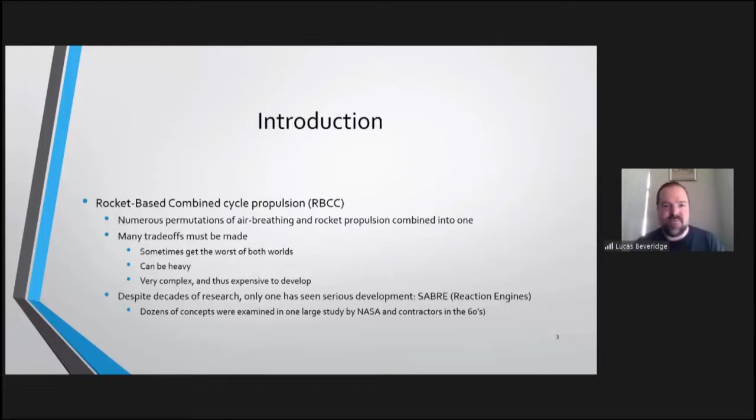They usually end up being extremely complex. It's one of those things, sort of like aerospike engines. It sounds really great in theory, but when you start looking into it in more detail, it's not so great. They usually end up being really heavy. You try to get the best of both worlds, but a lot of times you get the worst. And so they haven't gotten very far. I think Reaction Engines has probably gotten further along in development than anything else, as far as I know.

I know this is a fairly technical audience, so this is probably really basic here, but for those that aren't aware, the performance of any propulsion system, rocket or jet, is usually talked about in terms of specific impulse, which is the amount of thrust you get per unit mass of propellant going out the tailpipe. So of course a jet engine would have a much higher specific impulse than a rocket because so much of the reaction mass is just air. You get it for free, you don't carry it along with you. And so you can get more delta V in theory. I suppose I never calculated the delta V of a 747.

It would probably be extremely high because the specific impulse for a big turbofan is tens of thousands of seconds. So the delta V for a 747 would be enormous going around the world, but you have atmospheric drag in the way, which complicates things, so it doesn't actually keep accelerating, of course.

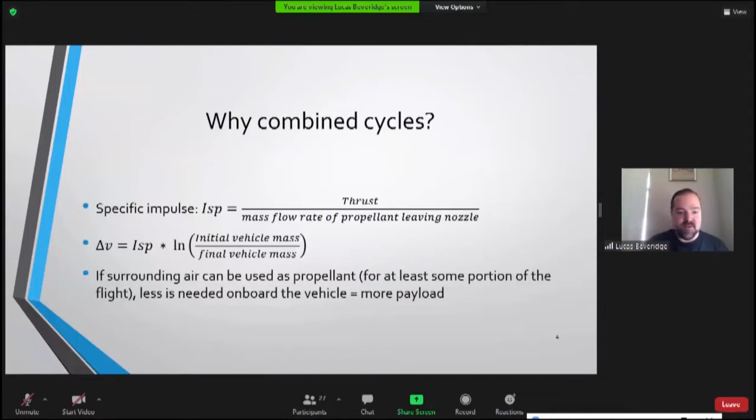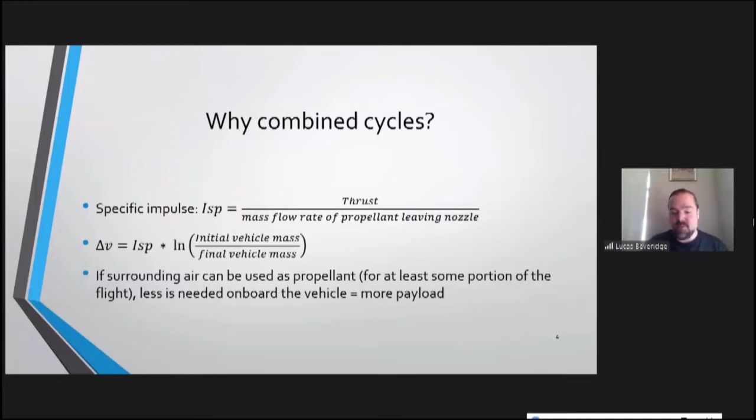But anyway, the whole point is that using the air as reaction mass can get you a lot more payload. So if you can accelerate through the air and get as much impulse out of it as you can, you don't need as much rocket fuel, and you can increase your payload to orbit and maybe even get away with a single stage vehicle.

So this is what I was thinking about. In a previous job, I used to be a design engineer for Honda, and it was not a strenuous job. I spent a lot of time daydreaming at work, and this is the kind of thing I daydreamed about.

So I was imagining, I had experience with hybrid rocket motors, and was wondering if maybe there was some way you could build a really simple combined cycle engine that didn't have all the complication of liquid hydrogen pumps and propellant, all this complicated stuff that would make it difficult.

And so what I came up with conceptually was a hybrid rocket combined with a solid fuel ramjet, which at the time I didn't even know was already pretty well developed. Apparently they've been studied for cruise missiles and things like that, and some had flown.

I started looking at that for a long time, a little bit in the background, as a side project, like I said.

So the concept really is you need to get up to high speed initially. So it would probably have to start as a rocket, or it needs a supersonic carrier vehicle to get the ramjet, or maybe even a scramjet, going.

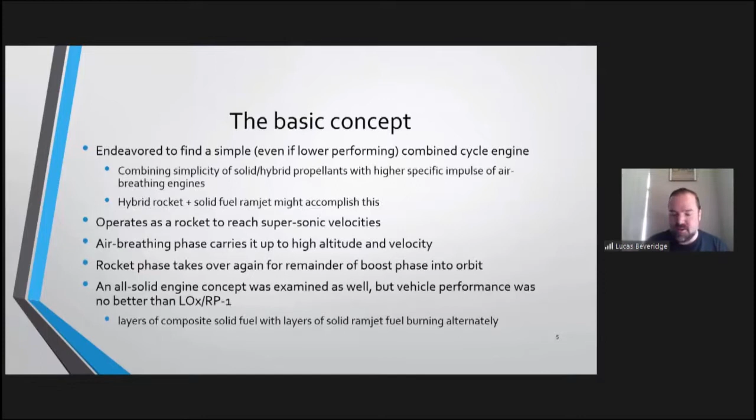But after quite a bit of modeling, I discovered that the overall performance was no better than ordinary liquid oxygen and RP1 kerosene, so I didn't include that in the final paper. I did in an earlier draft, but I found a few errors in my initial models, so it turns out the performance really wasn't that good. But I thought I would mention it because it's still really interesting that you could build something like that.

It's just a candlestick that switches back and forth between rocket and air breathing.

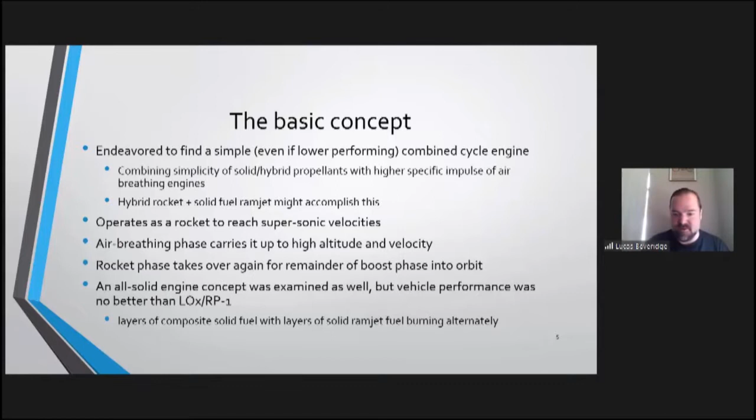So here's an illustration of what I eventually came up with. I settled on paraffin as a fuel because it has a high regression rate.

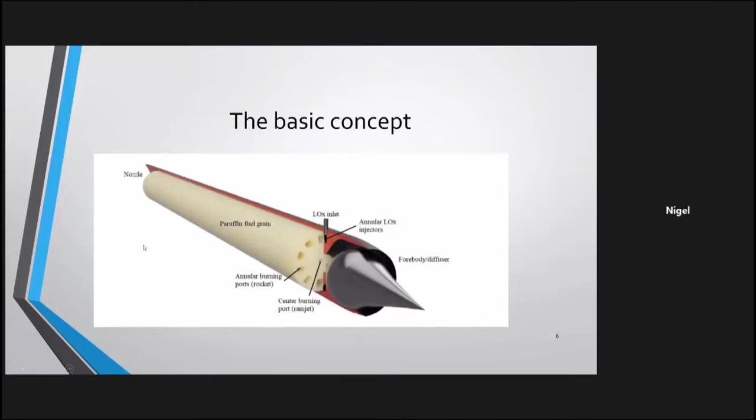It works very well in a hybrid rocket because it has a low melting point. It vaporizes very quickly, and so one of the issues with hybrid rockets is typically low regression rate.

A common fuel is something like HTPB, synthetic rubber, which has a high specific impulse, but it burns very slowly, or it regresses very slowly as it burns. Paraffin burns much more rapidly, so it produces higher thrust, but still has good ISP.

So in this illustration, you can probably see fairly well here, there's a center burning port where the incoming air is burned. So you have really two separate regions inside the one fuel grain: one where you inject liquid oxygen, and the other where the air is fed in from the inlet.

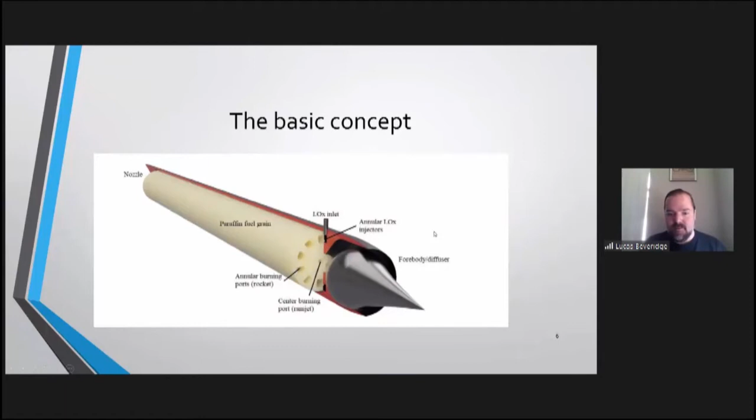So that's the basic concept. The implementation, or estimating the engine performance, gets extremely complicated. However, once I started getting into it more, I wanted to simply model the engine by itself, but that's not really possible.

You need to have a lifting vehicle. Something I discovered early is that you need a lifting vehicle, and you have to have a space plane to some extent. Even if you don't plan on landing on a runway, you have to climb gradually out of the atmosphere to get the most out of the air breathing phase. It can't be a pure ballistic vehicle like a normal rocket. Well, I mean, I could, but it would be kind of pointless. You're not going to get as much out of the air breathing portion of the flight.

So you have to know the specific impulse at any moment during the flight. But that, of course, depends on the vehicle velocity, the air density, the temperature, and how much fuel has burned away. The thrust and regression rate is a function of the oxidizer mass flux. I'll get into that later. But it ends up getting very, very complicated.

So just to show, to give a flavor of that, down here you have the effective specific impulse and equivalent effective specific impulse. Effective specific impulse is just the ISP at any given moment. T is thrust, D is drag, W is weight, and theta is the pitch angle of the trajectory. So the trajectory matters, the drag, the thrust, all of this has to be accounted for.

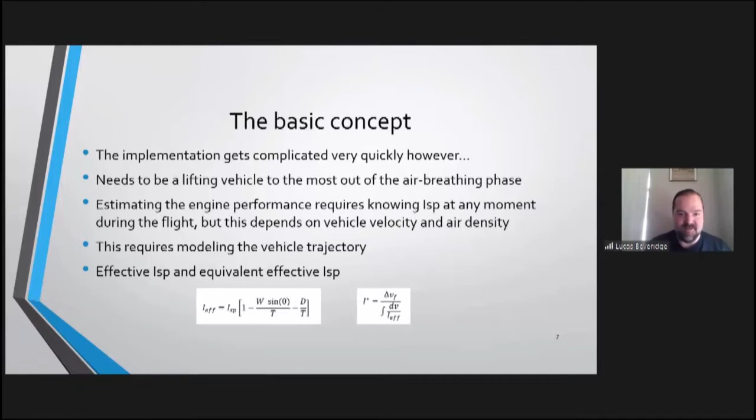So there were a few complex mechanical considerations I really wish I could have explored further, but I had to sort of hand wave some of these things. I knew they were solvable problems, like the variable inlet geometry for the inlet.

That of course has to be necessary because you're accelerating through such a wide range of Mach numbers, like the SR-71. It's not simply a cruise missile that's launched with a rocket and cruises at one specific Mach number.

The nozzle and the combustion chamber and all these things have to operate under two very different operating modes—two different chamber pressures, mass flow rates, temperatures—all of which put a lot of constraints on the design. This is some of the trade-offs I was talking about. Sometimes combining two different things, you may not end up with the best of both worlds.

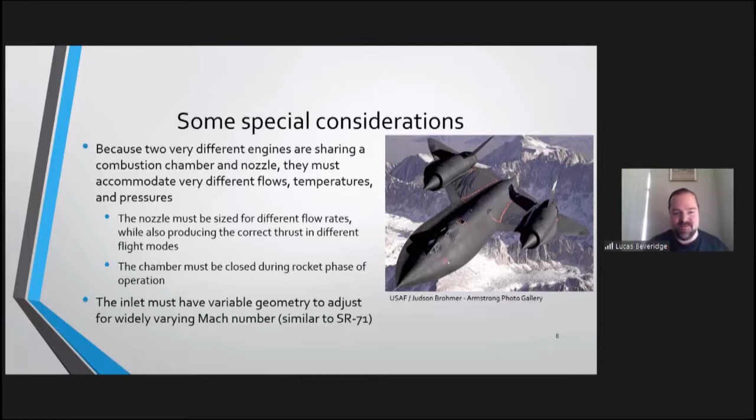So I'm going to step through more or less how I built my simulation code, my 2D trajectory code.

Because of the dependence on the flight path, you have to solve the equations of motion, but also solve for exhaust velocity and mass flow rate. Drag coefficient is a function of Mach number. Atmospheric density is a function of altitude, temperature, pressure, so I had to have an atmospheric model. Theta is a function of time as it goes.

So I had to build an entire engine simulation code that models the regression rate of the fuel, the oxidizer-to-fuel ratio, the ISP, chamber pressure and temperature, gamma, all the fluid properties as it's burning, to calculate the exhaust velocity and mass flow rate. But then mass flow rate is also a function of airspeed, and so on.

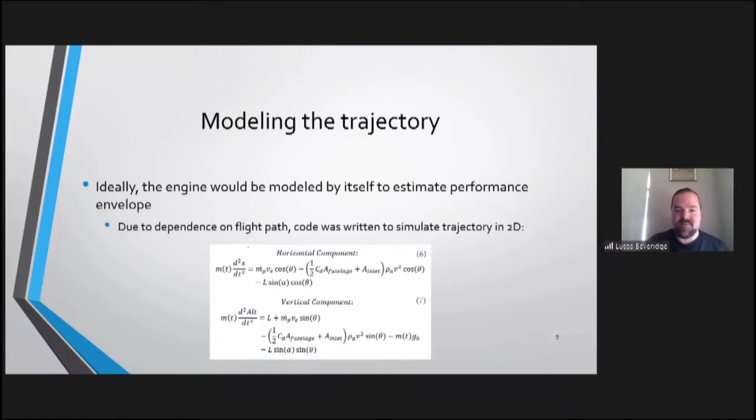So it gets—this took me a long time as a side project. I was teaching myself a lot as I went along. I should mention, I started working on this project in 2013, I think, and worked on it on and off, but I didn't actually get the final paper written until a couple of years ago. Then I finally submitted it and went through revisions. But yeah, it was educational.

So anyway, the other parameters you have to worry about—the chamber pressure is going to determine a lot of things.

But the chamber pressure, at least in the air breathing phase, is proportional to the stagnation pressure. But it's not equal to the stagnation pressure. It doesn't drop when you're at Mach 1 or below. You can assume it's pretty close to the same, but as the Mach number increases, the pressure recovery drops, of course.

That's why ramjets don't work very well above Mach 5 or 6 or so. At that point, there's just not enough air getting into the inlet. So that's another thing that had to be incorporated into the engine burning model.

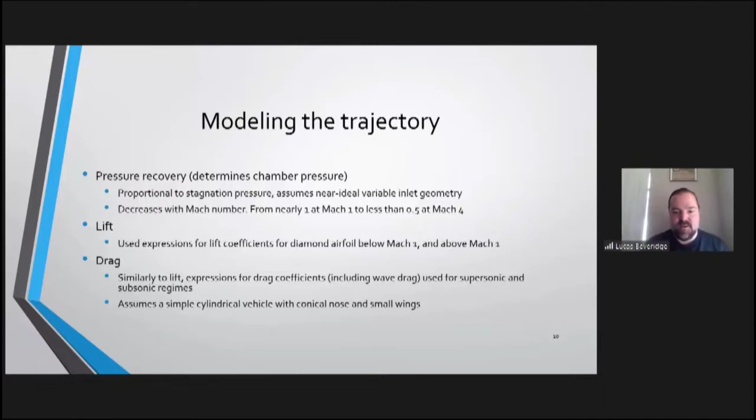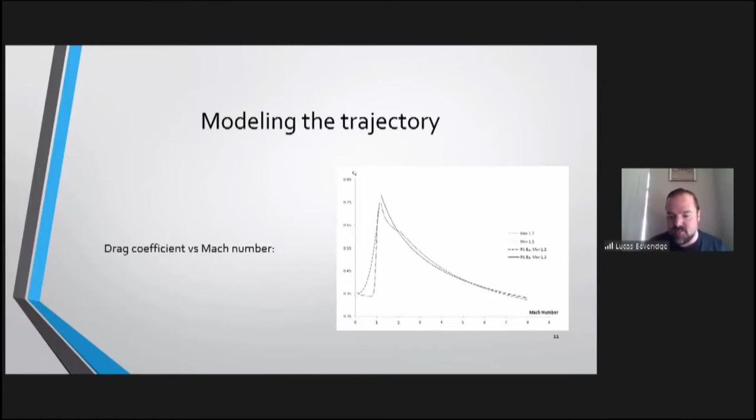Drag, similar. I actually had a CFD code that I was able to use to model wave drag coefficient. It was somewhat limited. I could only model it as a cylinder with a conical nose or an ogive nose, and short stubby wings. But I was able to model the diamond airfoil wings, fins. And this is just the drag coefficients that I got. So the small dotted line was the simulation, and the large dotted line and solid line are my best fit expressions that I used in the model.

And then there's the atmospheric model, which determines the temperature, pressure, and density of the air at any given moment as the vehicle is moving through it. They used the 1976 standard atmosphere. Pretty straightforward standard thing.

The engine itself, though, was more complicated, and I had written another code previously for simulating a performance code for modeling hybrid rocket engines, and I knew how to do that. I knew that worked very well. I was able to fit experimental data that I gathered from engine tests. So I was able to incorporate that and modify it to determine the mass flow rate and the fluid properties performance of the engine at any given moment.

But that also gets very complicated because it's also a function of oxidizer mass flux. So the rate that the fuel is burning away is a function of the pressure recovery and the airspeed, and it gets very complicated and ends up behaving in very non-trivial ways.

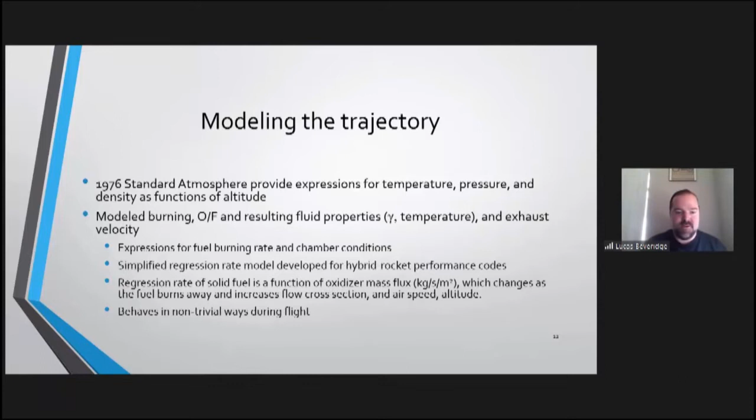Just getting these models to work correctly and making sure I didn't overlook something - and I very often overlooked a lot of things. So I did eventually get it all put together, but doing this as a side project while I was in grad school, working on other things, was interesting.

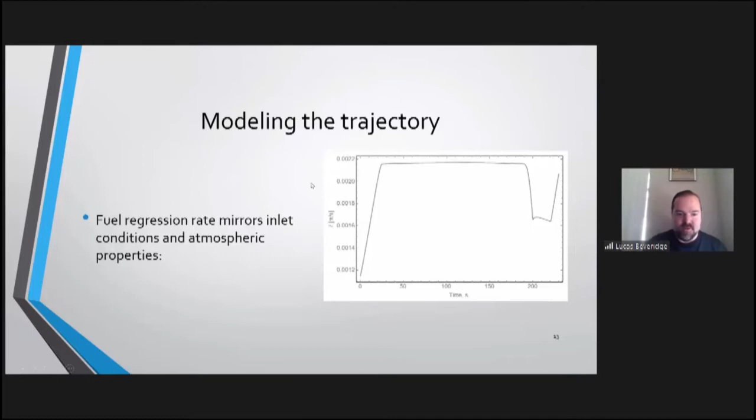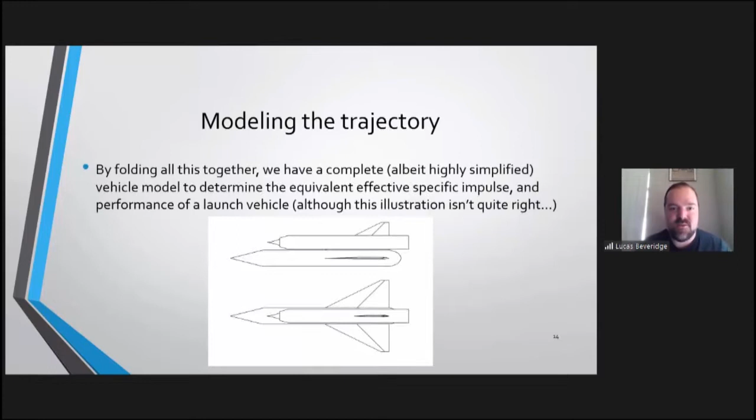The wing loading would have to be really high. Like I say, I'm not an expert in aircraft design either, so I calculated the stress in the wings to make sure they wouldn't break off because the wing loading is extremely high. But I found you could do it with composites. It is possible, but it's certainly not an ideal design. Better designers could do a better job than me. I just wanted to show that the vehicle could work and what the potential performance is.

So I did, as best I could, mass component breakdowns of the vehicles. I did look at an SSTO and a two-stage option. The single-stage vehicle, well, I'll get to that, but it performs okay. But there's a lot of other masses. My referee pointed out to me - his quote was, 'The devil's in the details.'

In my first draft, I didn't incorporate all of the component masses and vehicle mass. He pointed out that with these sorts of vehicles you have all these other structures, wings, landing gear, thermal protection, it adds up. So I did incorporate all of that, and at the end I have mass breakdowns for all the different vehicles, if anyone's interested.

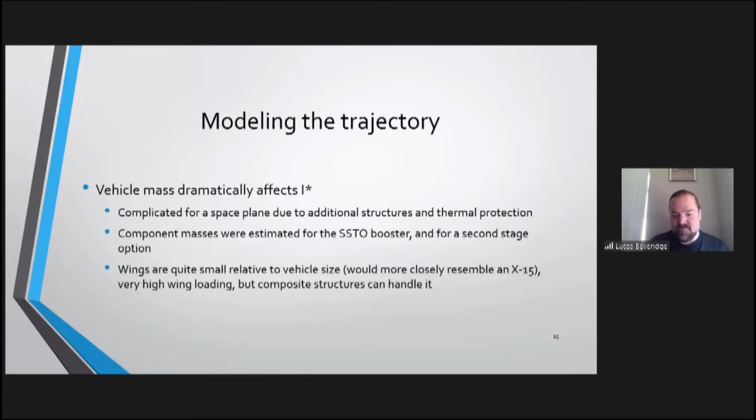Bottom line is it still works out pretty well, at least for a two-stage, and even a single stage is okay. Like I mentioned, the wings are pretty small, so the wing loading would be really bad. I wouldn't recommend anyone design a vehicle like this for real.

Here's a notional launch profile. My original idea, you'd launch this thing from the ground, it accelerates up through the atmosphere, but doesn't quite reach orbital velocity on its own. That would save some delta V in the vehicle, launch more payload, and then the payload circularizes its own orbit, and the vehicle re-enters on its own, so you don't need extra OMS propellant for deorbiting or anything.

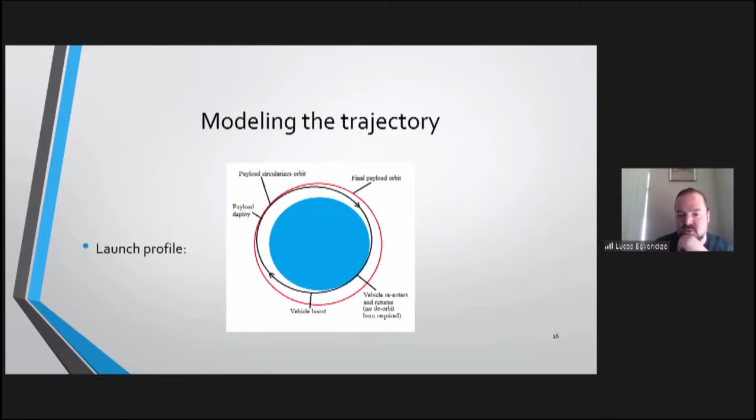As I said, I looked at two different versions, a single stage and a two-stage option. The two-stage vehicle was essentially the same as the SSTO, but it had a booster, with a second engine attached on top to give it more delta V. So it changed the model a bit, and includes additional TPS because I assumed the second stage would re-enter.

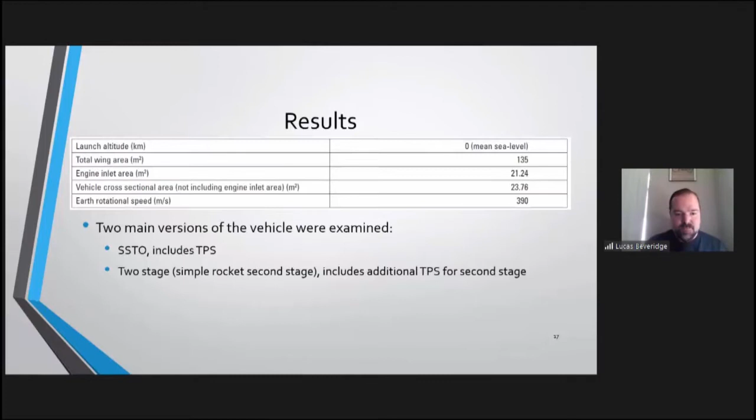I didn't have any illustrations of it, but I imagined the second stage would be something like a lifting body, so it could also land on a runway.

Here's how it compares, the final version ended up comparing to other launch vehicles. So for the two-stage version, GLOW is gross liftoff weight, percentage of gross liftoff weight that makes it to low Earth orbit. The two-stage version was about almost 9%. The Block 5, the Falcon 9 with booster reuse...

It was kind of hard to find information, but I did find an estimate, about 3.8%. Single stage to orbit was 11.5%, but there's not that much payload.

The Venturestar rocket, I used a typical LACE engine, which was a liquid air cycle engine, probably the upper end of the performance envelope for a combined cycle engine. So I used that as an upper limit, and I used the Venturestar space plane as a lower limit because that was a rocket-based SSTO. So those are my upper and lower limits.

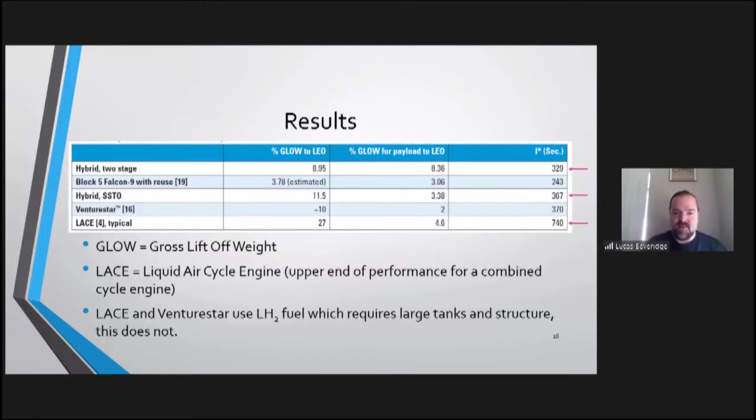So that's all I had in the PowerPoint. I'm probably forgetting details. So yeah, I'm ready for questions now. I'm sure there's a few.

Oh, thank you, Lucas. That was a great talk. Yeah, I knew it would be pitched right for the engineers in the audience. So thank you so much for that. Yeah, right, let's have a look, see what we got.

Okay, questions? Anyone?

Okay, Mark, I'm going to pick on you first. Yeah, go for it. Lucas, did you look at charge stress at all?

Paraffin wax is not a particularly good engineering material, and I've had bitter experience of solid propellant rocket motors with charge breakup. Did you look at any charge stresses at all? No, there's a lot of details like that I had to just hand wave past and say, well, okay, you'd probably have some webbing in the fuel grain to support it or something like that. But it would be necessary.

Something else I thought about, but didn't put in the illustration, is you might have a partition between the section of the fuel grain that's air breathing and the section that's rocket burning, just to prevent one from bleeding into the other or consuming too much of the other. You don't want the air breathing phase to eat up too much of the rocket propellant and then not have enough left over to reach orbit.

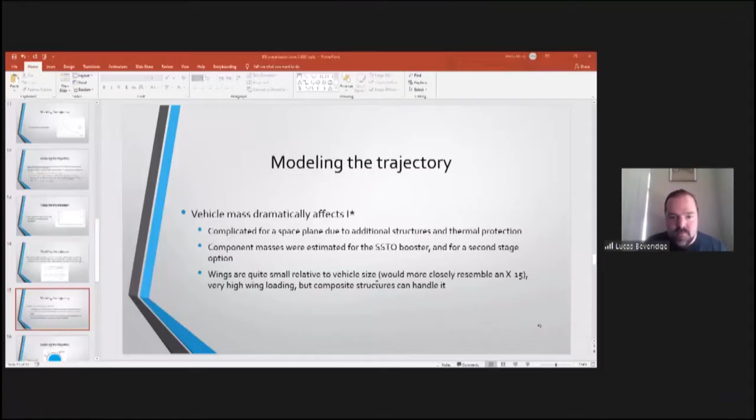Oh, I see, so using the fuselage itself to produce lift instead. Is that correct? Yes, I think that's what you mean. Yeah, that's a possibility. I didn't model that, I didn't use any CFD codes to estimate the lift around the fuselage, but the wings are small enough that you might be able to get away with that, maybe widen it a bit, change the shape so it produces lift on its own, and then you don't need the wings, because you really just need the lift during the ascent phase to help the trajectory. So that's a possibility, I didn't look at that though.

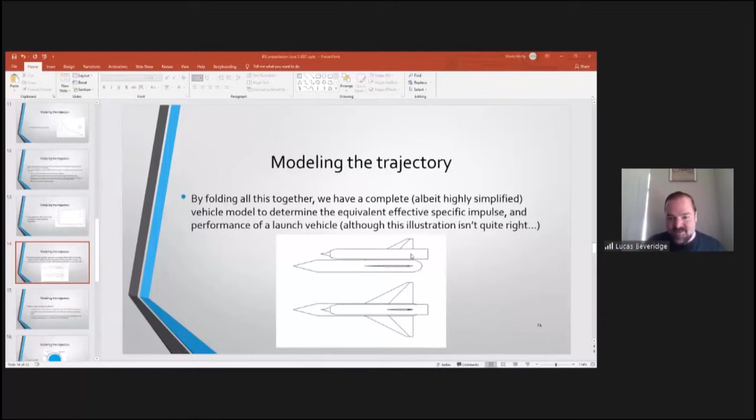The other thing he said was that the thrust line would also result in a large angle of attack. Oh yeah. So you might rearrange the engine, you might have two smaller engines or something closer in, on either side instead of above.

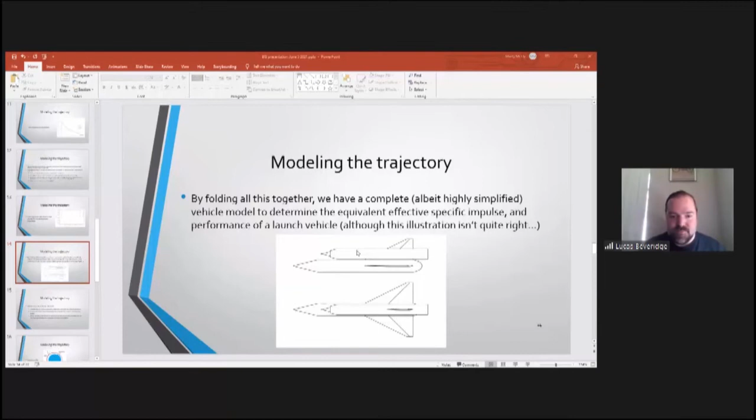Okay, great, thanks. Right, next question is, oops, bear with me. So Michael Richardson asks, actually he's got a couple of questions. He said, would it take off horizontally or vertically?

That's a good question. The takeoff speed would have to be really high with those small wings, so you would have to take off maybe off a ramp or a rail or something. I had originally assumed it would take off from a runway, but the takeoff velocity is 0.6 Mach or something like that because it's so heavy. So it's somewhere in between is the answer. At least for this vehicle, a better engineer might come up with something that could take off from a runway.

Michael suggests, what about a railgun? Yeah. Darryl, how do you think the engine would compare to Reaction Engine's engine? Theirs is probably a lot better, especially since it can be refueled easily on the flight line, and it can take off from a runway.

The one thing I forgot to mention during the presentation is that liquid hydrogen is used as propellant in most of these things, like the Venture Star and LACE engines, and the low density requires giant tanks and insulation and additional structure and all these other things, and that was a big part of the reason.